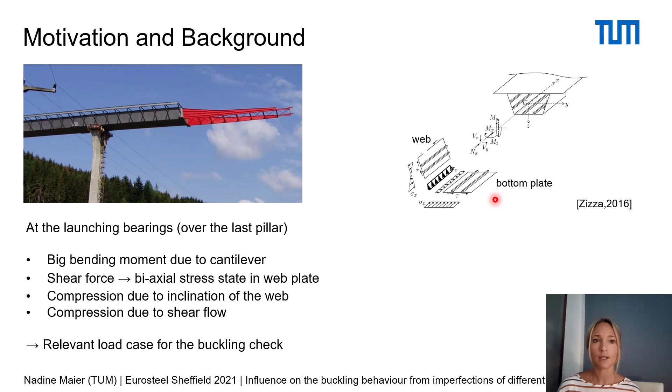Additionally, during the incremental launching, the webs of the superstructure and the launching bearings often don't share the same center lines. The eccentricity can be caused by imperfection in the production process, misalignments of the launching bearings, the necessary air gap to the lateral guide, as well as the different thicknesses of the web along the superstructure.

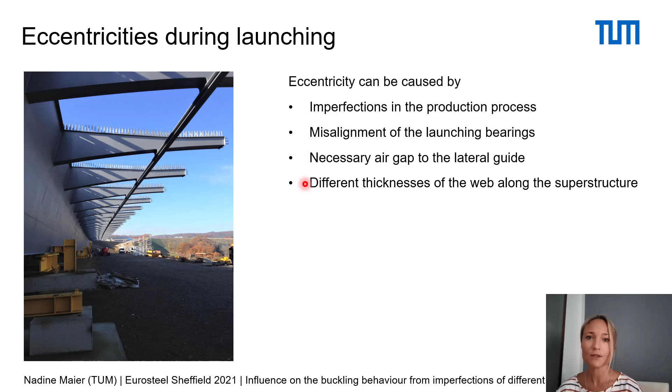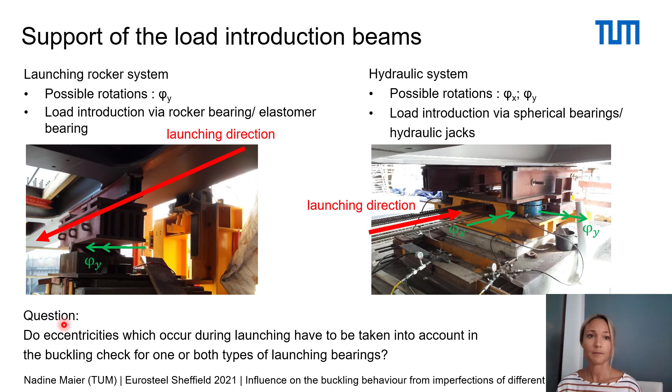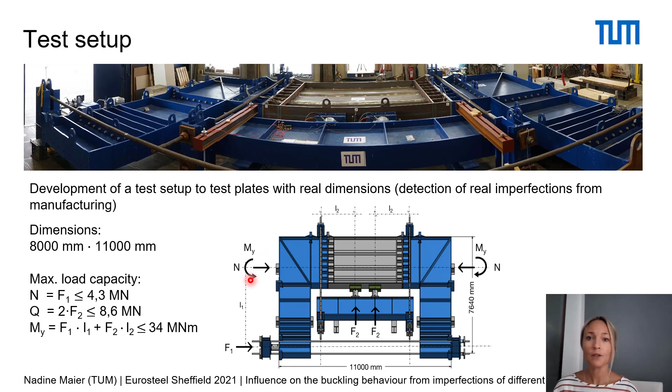The dimensions were chosen in order to test specimens with real dimensions to take into account real imperfections from the manufacturing. The external dimensions of the test setup are 8 by 11 meters. This allows to introduce a normal force F1 of 4.3 meganewton, a transverse force F2 of 8.6 meganewton, and a bending moment My of 34 meganewton meters into the specimen.

In total, 12 specimens were tested. The dimensions of the web were chosen with 3 by 4 meters and the thickness with 8 millimeters. Parameters which were investigated are the stress ratio sigma z to sigma x, different bending and torsional stiffness of the longitudinal stiffeners and their distances, and, what is particularly important for the topic of this presentation, different bearings and eccentric load introduction of the transverse load.

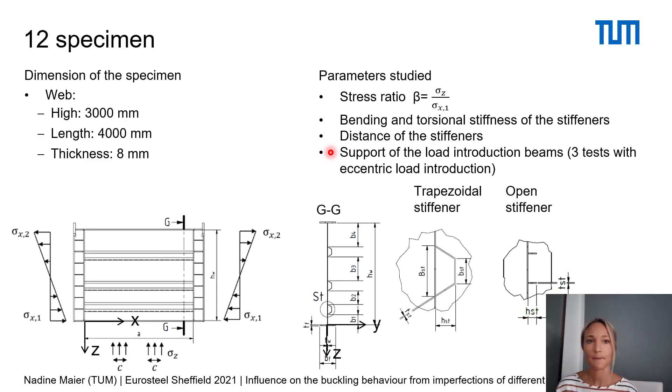Based on the experimental results, a numerical model was validated and an extended numerical parameter study was performed. The numerical model and the results of a few interesting parameters are presented in the following. The numerical model was created with the finite element program ANSYS.

The material is defined as a bilinear material curve with the yield strength from the material certificates for the recalculation of the tests and 355 Newton per square millimeters for the parameter study. The tangent modulus is set at 1450 and the Young's modulus at 210,000 Newton per square millimeters.

The load is applied through two external points coupled to the corresponding surface of the specimens via beams with equivalent stiffness of the test setup. The degree of freedom phi x of the external points F and G for the load introduction of the transverse load depends on the examined launching bearing and is free or fixed.

As elements, shell elements with 4 nodes and 6 degrees of freedom with a size of 2.5 millimeters were used. The contact between the launching beams and the plate is defined with a coefficient of friction of 0.2. The imperfection is taken as the first buckling mode and its amplitude is scaled according to Eurocode 3 Part 1-5 Annex C.

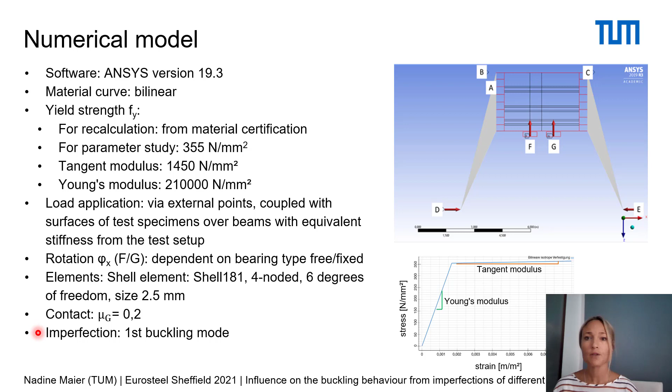The second model represents the launching rocker system. Here the external point is modeled at the height of the launching beam and again connected to the surface. The rotation phi x is fixed. The model is called M2.

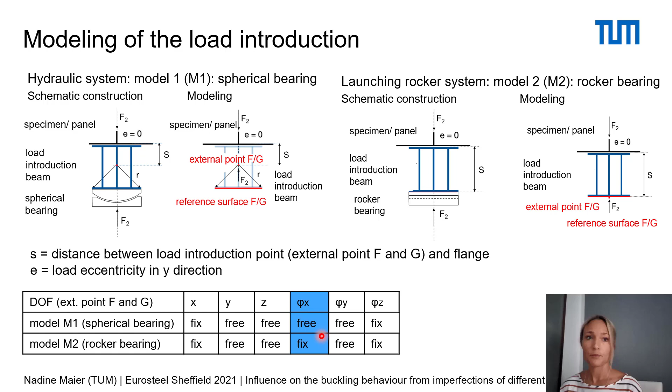For this presentation, it is only necessary to know that M1 or 2 identifies the type of the launching bearing, EF stands for local buckling and GF for global buckling. Then comes the parameter S. You can see it here at the right side. S describes the distance between the external points for the load introduction to the superstructure.

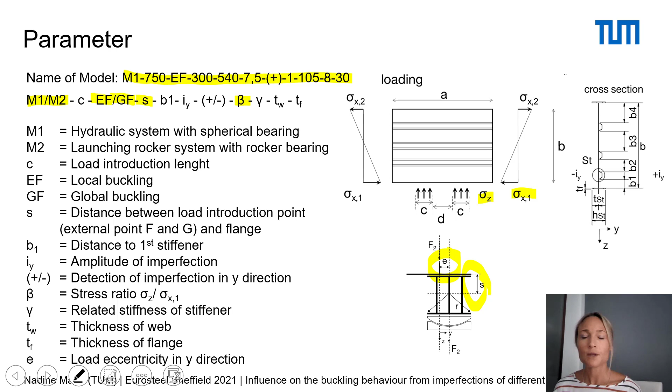And beta is the stress ratio sigma z divided by sigma X. E is the eccentricity of the load introduction, which is varied between -30 to 30 millimeters. Here you see the influence of the different launching systems on the basis of the different boundary conditions phi x at the external points for the load introduction.

The diagrams show the load factor as a function of the load eccentricity. The load factor for the model with S = 300 and E = 0 is selected to be 1.0, once for global buckling at the left side and once for local buckling at the right side. In both cases, it can be seen that an eccentric load introduction has an influence on the load capacity using hydraulic bearings. In case of the launching rocker system, the eccentric load introduction has no influence.

The lines are horizontal. It is interesting that in case of local buckling, a difference between the two systems is already detected at E = 0. This is due to the different boundary conditions and the associated buckling length of the first single panel.

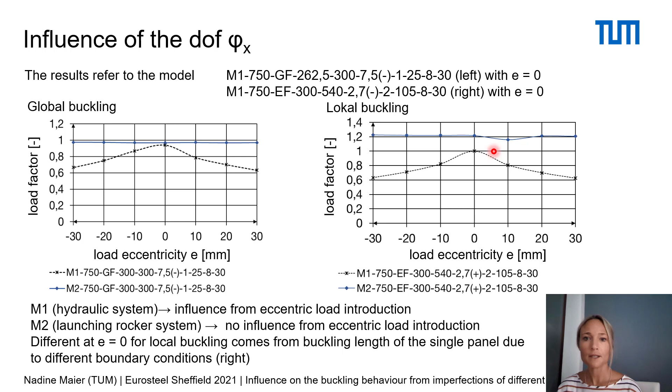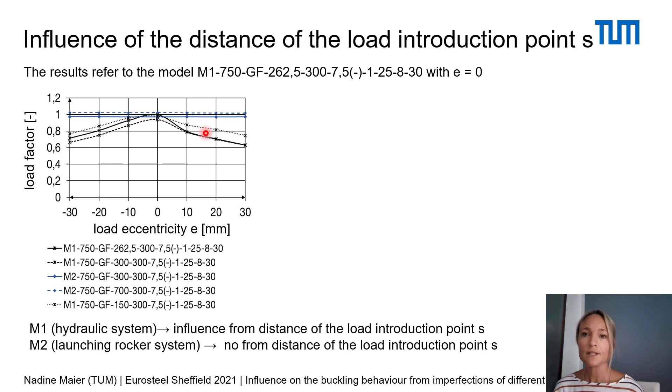Here the results of the investigations of the distance S of the load introduction are presented. The diagram shows the load factor as a function of the load eccentricity again. The distance has little influence on the model M2, which are the horizontal blue lines. For model M1, it can be seen that the load factor decreases with an increasing distance S and the influence from the eccentricity grows. For example, you can compare the black lines.

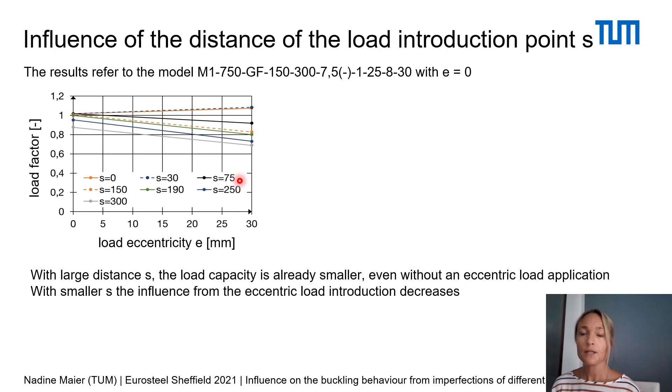In the next step, S is varied until the influence from the eccentric load disappears. In the diagram, S is varied from 0 to 300 millimeters. It can be seen that the load capacity becomes smaller with large distance S, even without eccentric load. With smaller distance S, the load capacity stays almost the same and also the influence of the eccentric load disappears. This is noticed for S between 7.5 and 30 millimeters.

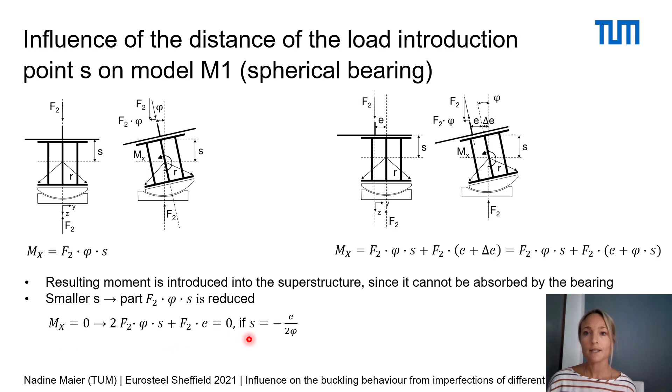This effect can be described and is shown here. The rotation results in a torsional moment mx. Without eccentricity, this depends only on S. The case is shown on the left. On the right, you see the equation for mx with eccentricity. When mx becomes 0, there should be no influence from the eccentric load introduction. This is valid for S equal to minus E divided by 2 phi.

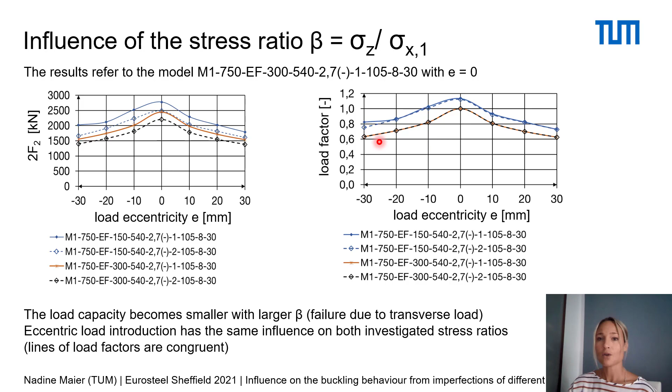If you look at the diagram on the right side, you can see again the representation via the load factor. The model with S = 300 at E = 0 is selected as 1.0 for both stress ratios. The curves show that the influence of the eccentric load introduction is the same for both stress ratios, and the lines are congruent. Now I come to the summary and the outlook.

It was determined that an eccentric load introduction has an influence on the buckling behavior by using open girders with hydraulic bearing during the incremental launching. With an eccentric load introduction, the distance S has an influence on the buckling behavior by using open girders with hydraulic bearing. Closed girders have not been investigated yet. A better load bearing behavior is expected. Due to the higher rotational stiffness of the bottom plate, the influence of the eccentric load introduction will become smaller.

Previous recalculations according to Eurocode 3 Part 1-5 and Eurocode 0 show that the results are on the safe side in most cases, although they are influenced by the eccentric load introduction. More detailed results will follow. The results present a part of the final investigations on the influence of the eccentric load introduction. All results have been checked with regard to the existing safety level and are currently being evaluated and analyzed.

Results will be published at the end of September in the final report of the IGF with the IGF number 20455.